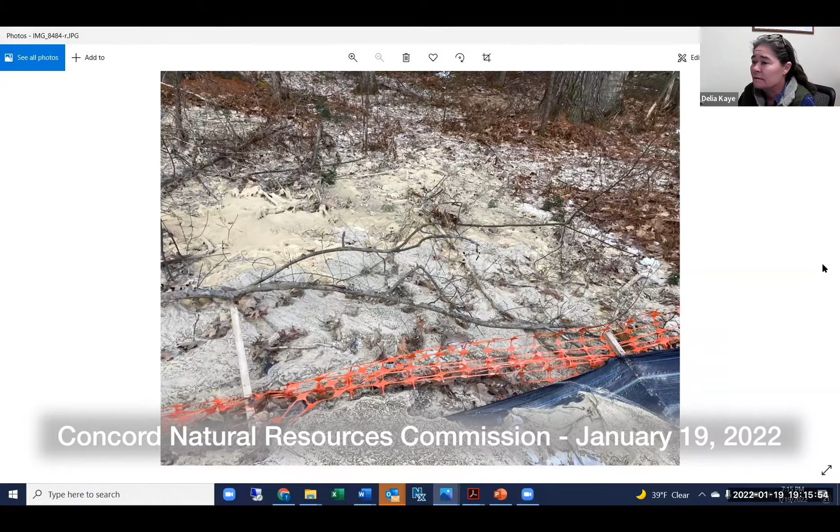So this is a photograph immediately down gradient of the overflow. This is behind, sort of in this direction is the irrigation pond. This is obviously the silt fence with overflowing silt. Heading down, let's see if I can go through some of these photos. That is a breach that we think was an underground gully. There's a little channel that's not jurisdictional, but you can see there's silt traveling all through here.

It did enter the Jennie Dugan wetland system. Let me see if I can pull up that photograph, which is, I'm sorry.

Are you seeing the wetlands? Okay, so this is where it stopped. It's not a lot of sediment, it's a thin layer of fine silts that came off the slope.

So I went out there with the assistant town engineer, Justin Richardson, and we met with the general manager, Greg Sincata, and Peter Rapocchio, who's the grounds manager, and directed them to install remediation measures. Stamsky should get out there and tell them what measures they need to take, but we suggested that at the top of the slope, they install a temporary settling basin.

Let me get back to the plan here. So where on the plan, Delia, was the breach specifically?

So the breach was, what happened was, this slope now is all planted, as is the majority of this area. They hydroseeded this actually with Flexterra, but it was planted too late in the season for them to get any hydroseed down. So there was gullying that occurred here in 2 or 3 different locations that basically traveled into this sediment forebay.

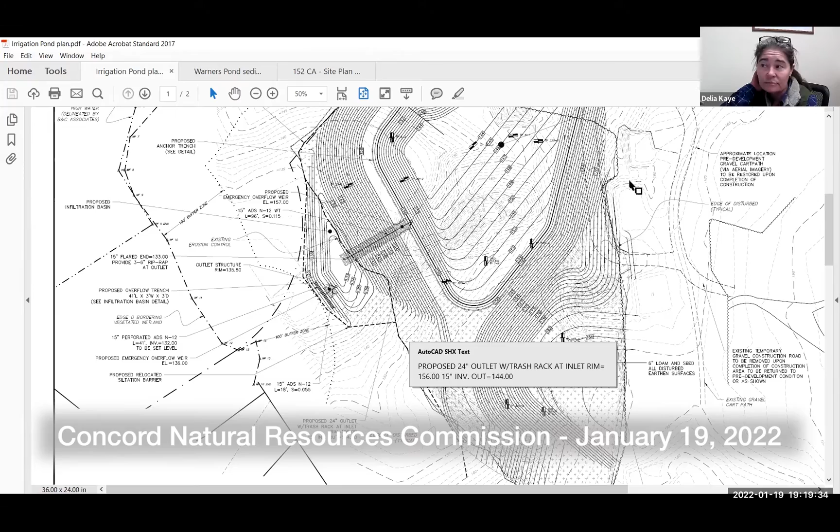So we suggested that they put in, since this is sloping down here, some sort of basin up here so that this unstabilized material has somewhere to stop, and then a series of check dams as you go down the slope into those rilled areas. Then as soon as they're in spring conditions, they'll need to replant and stabilize those areas.

So that was a disappointment. They are on top of it, they say they will get it taken care of, and that is what we hope to see in very short order.

Is any remediation needed in Jennie Dugan Brook in the wetlands? Yeah, they'll have to take all of that material out. As I said, it's a light layer of silt, but that will have to be removed by hand, along with all the sediment-laden leaf material, going back up.

So it's about 100 feet from where the breach overtopped the erosion control barrier and traveled down into the wetlands, so there was obviously some velocity associated with that.

On a positive note, last night CPC recommended their projects for the warrant, including $1 million for the Assabet Bluff housing project.

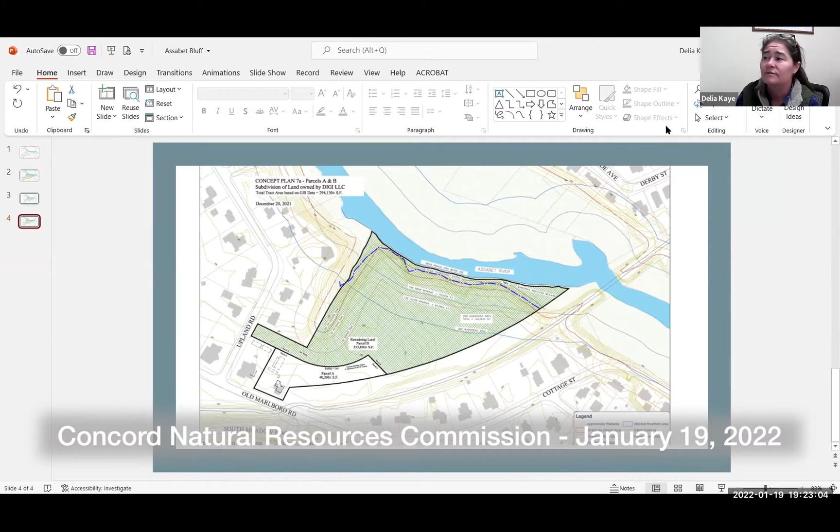With that configuration, the funding has sort of flipped from initially, when we were first talking about it, housing was going to contribute about two-thirds of the funding and open space interests were one-third, and now we're flipping that to two-thirds open space and one-third housing.

So that breaks down to, well, I don't know if you want the actual breakdowns. It's a number of different housing sources. From the Community Preservation Act, the funding allocation would be 700,000 from open space and 300,000 from housing.

And then affordable housing trust funds, this is just towards the purchase price, would contribute 600,000. Concord Housing Foundation, 50,000. And then for the open space, the land trust is committed to...

1.05 million. What we're trying to do is have that fundraising reduced. It's pretty substantial for approximately 6 acres of open space and a very short time frame with a July deadline.

We are submitting a Land and Water Conservation Fund application. I'm working on that right now. It's due on Monday. We'll also put in an MVP grant.

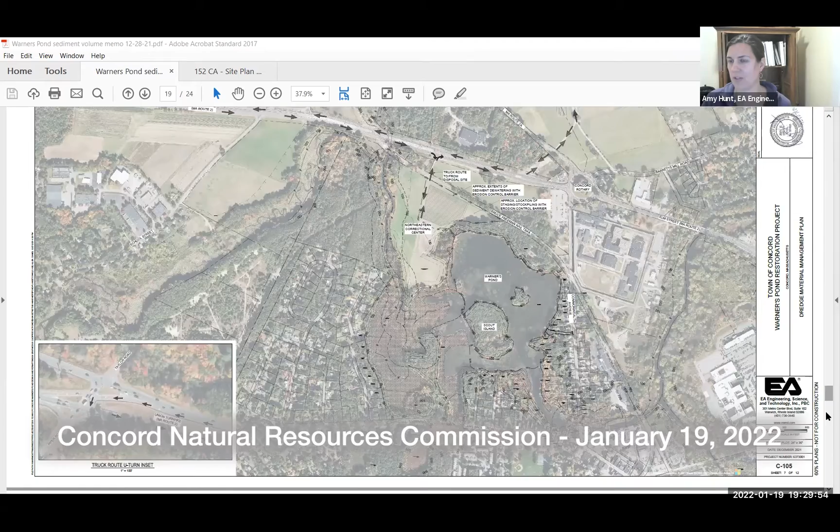Yes, so at the last meeting, there was a question on how big would the pile be, and how much material, what would the volume of material be in this pile? So we had done some calculations, and we took those and put together a memo that we sent to Delia that gets into the weeds and details of how we came up with the size of the pile.

To summarize our several-page memo, hopefully I can do that: we are excavating approximately 35,750 cubic yards of sediment from the pond, and then approximately 4,470 cubic yards of that dredge material will be pumped, still within the impoundment, from one area to another to make the wetland shelf.

So the remaining approximately 31,300 cubic yards of dredge sediment will be pumped hydraulically into the settling area that we have designed to hold that material.

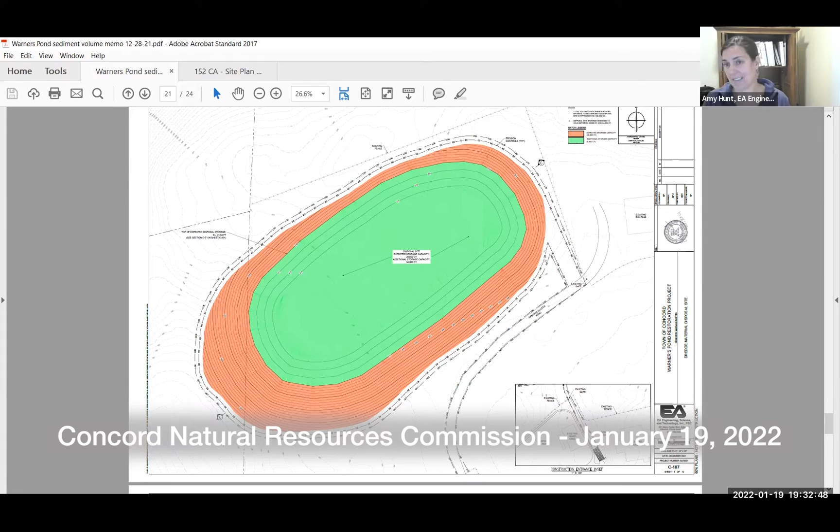If we're talking about sand, the volume would be slightly bigger than what it took up in the pond. In this case, we also have organic material. Because the material swells a little underwater - organic material tends to absorb more water and take up more space when wet than when dry. So there's a shrinkage factor also associated with the organic material.

Taking the bulking factor into consideration, as well as the shrinkage factor with the organic material - the shrinkage factor was a little bigger than the bulking factor - so the 31,300 becomes more of a volume closer to 28,000 cubic yards. That's what we've outlined in our memo and tried to show on the plans here.

We did include a factor of safety for this because, although we have the physical characteristics of the sediment in the pond, there are bound to be some areas, some pockets, that didn't get sampled. So we wanted to take that into consideration with a factor of safety, adding an allowance for additional storage of about 5,500 cubic yards of material, give or take.

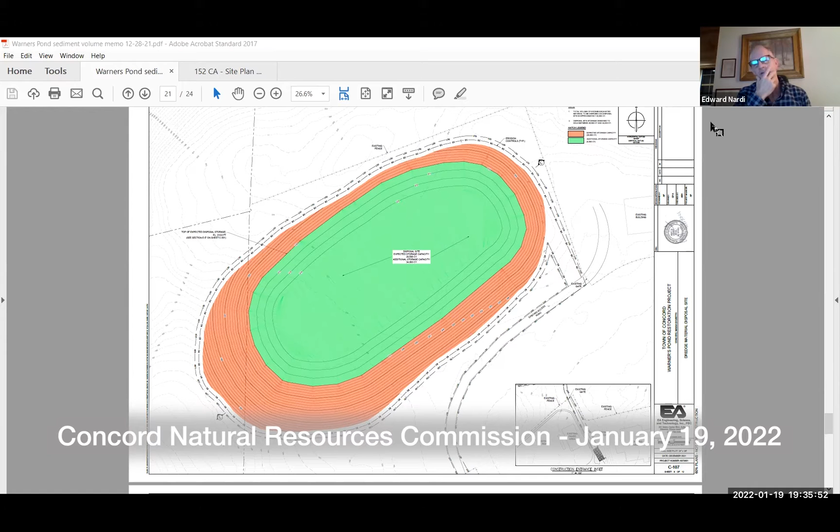Well, just as a follow-up, I think it was helpful, because last time we discussed this, I was under the impression it might be even a little smaller in terms of final volume on site after the water settled out of the sediment. But I assume, like good engineering, that's relatively conservative in terms of the engineering factors, so hopefully it will hit that 28,000, give or take. I appreciate you being conservative.

Other than that, the higher math is beyond me, in terms of some of the engineering. Any other comments from the commissioners in regard to this?

Any comment from the public in regard to this petition?

Carlin Reed, 83 West End. I'm the person who's going to be able to see this dump pile from my house. I have to say, I'm impressed with how much detail both the department and the commission has gone into looking at this aspect of a huge project, and thank you very much for paying attention to this. I do appreciate that, that's it, just my comment.

I just wanted to ask, Alex indicated he also received comments from other organizations and that he'll be responding to those. We'll get to see those responses when they come in, because I'm curious about the wetland shelf that's being developed. I'd been curious about that last time, and I see several of the questions asked about that as well.

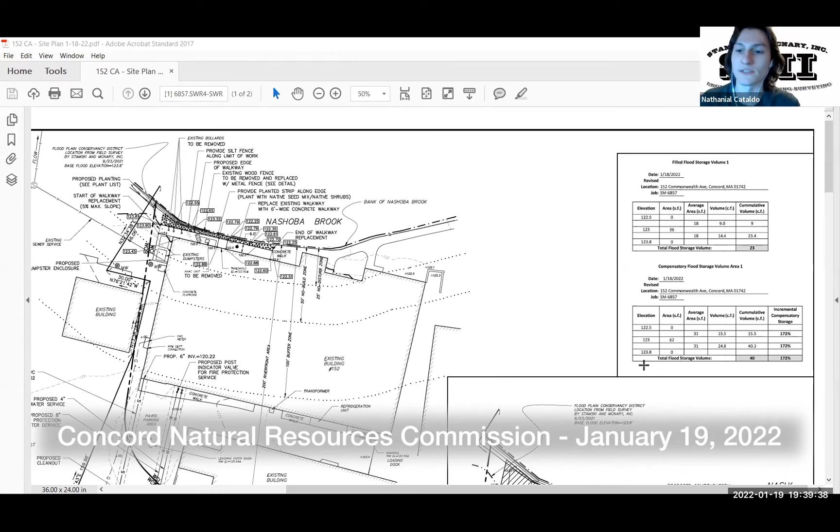Right below that is a blown up detail that shows where the areas being filled are and where the compensatory storage areas are. So basically, like we talked about last meeting, the fill is the result of the walkway being ever so slightly raised in the middle and towards the edge, to work with the grade and better come up to the door. The compensatory area is the result of the part of the walkway being taken away, so that volume is going to be taken out. It works out greater than a ratio of 1 to 1.5, as it's supposed to.

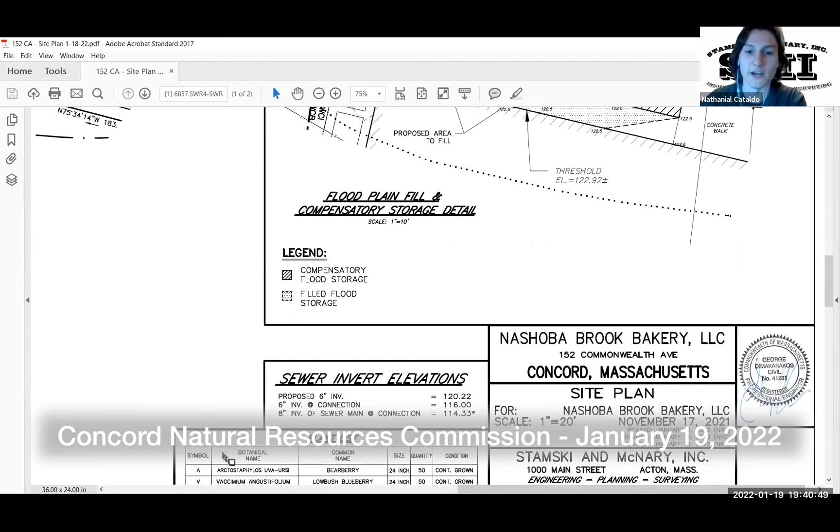In addition, in the area where the walkway is going to be removed, we got a little guidance from conservation staff on the extent of plants they wanted to see. So we provided a bunch of low cover shrubs that will fully cover the new planting area, which is going to be where the walkway is taken out. That'll better restore the area.

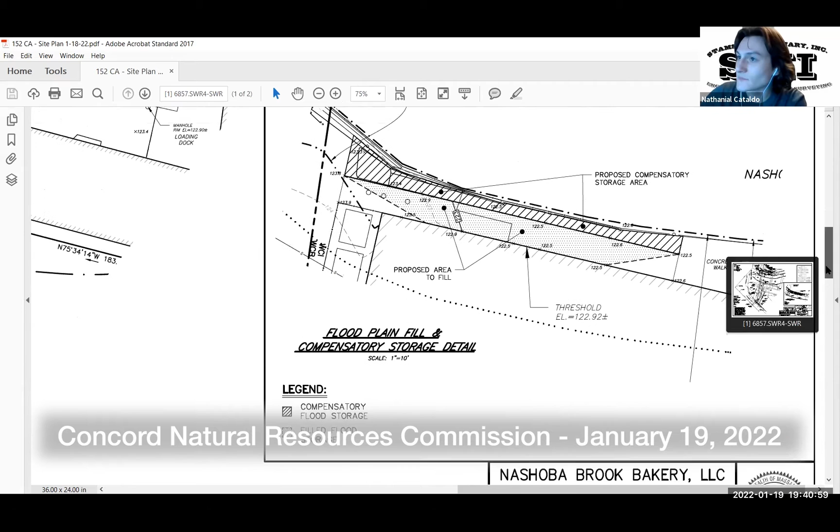That is pretty much it in terms of comments. Just to get ahead of it, the town engineer also had a comment about how the bollards were coming out, and I talked to him about it today. Really, he said it was only as an assurance that cars wouldn't drive down. However, there really aren't any there right now. I had shared some pictures with Delia this afternoon, they're just remnants, like a couple inches high, as if they were taken out, so they really don't serve any purpose.

Given that the walkway is going to be a lot shorter and a lot less wide than it is now, only 6 feet, it would be impossible for a car to drive down. So we don't really see the need to put a new one in there, considering the rehabilitated walkway will be better suited for walking and not really possible to drive down.

So that is pretty much it. I can take any questions if there are any.

Thank you, Nathaniel. Do any of the commissioners have any commentary in regard to the revised plans?

Is there any likelihood that, since it jogs there, it doesn't seem to be very suitable for bicycles either? Is that what you'd say, in terms of traffic? I don't know. I'm asking a question the engineer might ask, as in, is it likely for one to drive down there? I don't really see any need to.

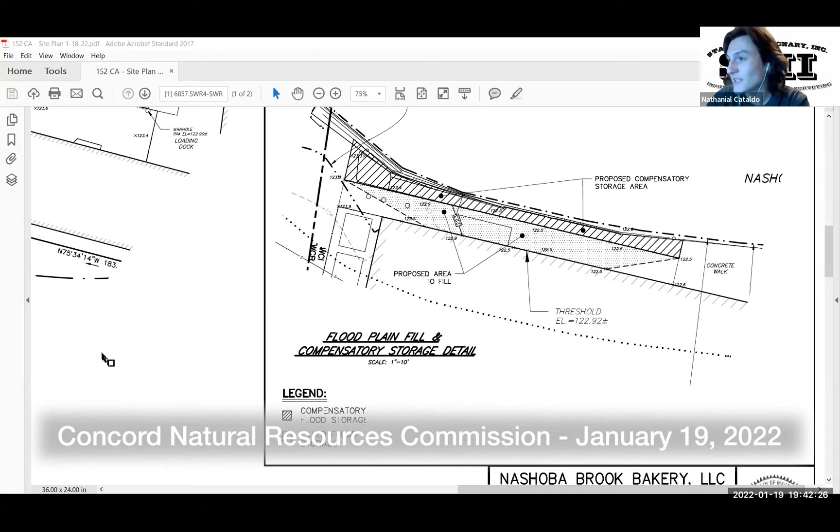There is a door, I guess there's a back door back there. I was only thinking if you go down to the bridge, if you're trying to cut over to the parking lot on the other side. I don't really think so. It's not adverse to it, but there's really nothing in place that would stop it. I really don't see any need to.

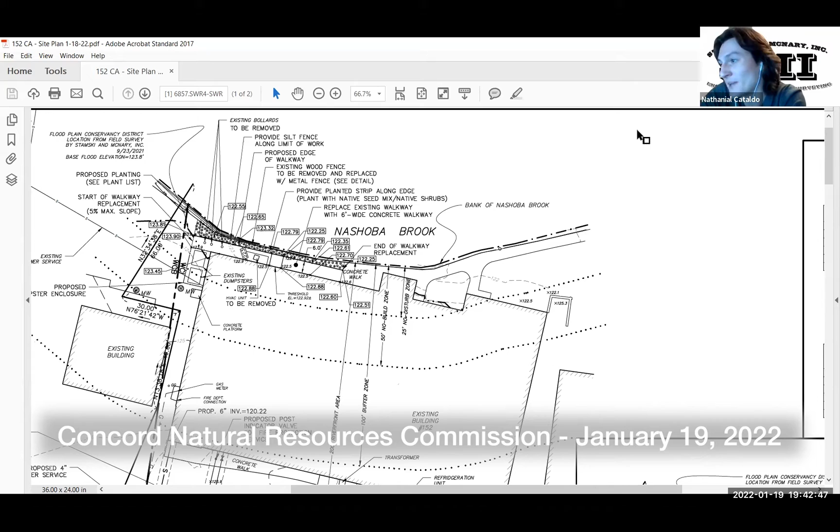It gets very narrow at one point. I agree, especially around where the bump out in the building is. Right, I don't think it's a safety issue, and I also don't really think it's encouraged. Okay.

Any other comments from the commission? I just had one comment, Nathaniel. Delia, do you have a picture you could pull up of the existing condition? I was wondering, where you're cutting out and doing the plantings along the edge there, I did see in the picture that there seems to be some boards along the rail edge. When you replace the fencing, is there going to be boards put back, or a metal edge, to retain the plantings and soil so it doesn't fall over the retaining wall? Nathaniel, can't hear you again.

Okay. Try again. Not yet. Hold on, is that working? Yeah, yes, now. Yes. Okay, thank you. I need new headphones. Sorry about that, looks like it.

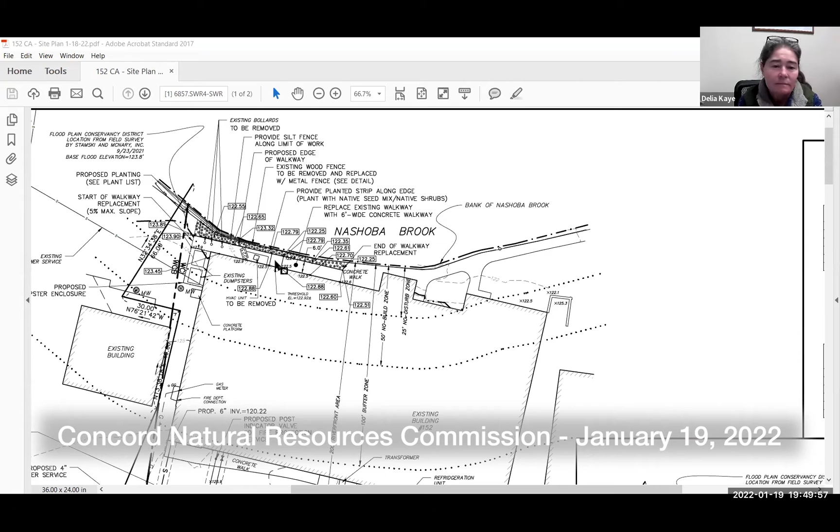At any rate, if you could take a look at that, Nathaniel, just trying to safeguard debris going into the brook. And also, I'm just noticing this 223, shouldn't that be 123? Oh yes, yep. Okay.

Any comment from the public regarding this application? All right, okay, hearing none, I think we'll hold over to February 2nd. Delia, I would assume we could get an order of conditions together by then?

Yeah, okay. And just the big comment there was kind of have pitch the walkway such that it pitches down towards the middle and terminates at the end of where the pavement is, I guess, right? Well, I think because you're so limited, don't you have to hold your elevations now, given this cut and fill and the storage volumes, right? I don't think you want to, if you change that, you're gonna have to change...

So what is it that, just so I have it clear, what's the main thrust of the comment? Yeah, the main thrust of the comment is to make sure the soil is contained, that it's not gonna, in a heavy storm, wind up in the brook. If you get a major rainstorm and it's slowly sheeting through that light ground cover plantings, you might get some spillage over into the brook, that's all. It's a relatively straightforward comment, if you will.

Ed, Suzanne Delia, you have your hand raised. Thanks, I've been working with the bakery on this. Can I have your name and address for the record, please? Suzanne Spinney, 270 Fisk Street, Carlisle.

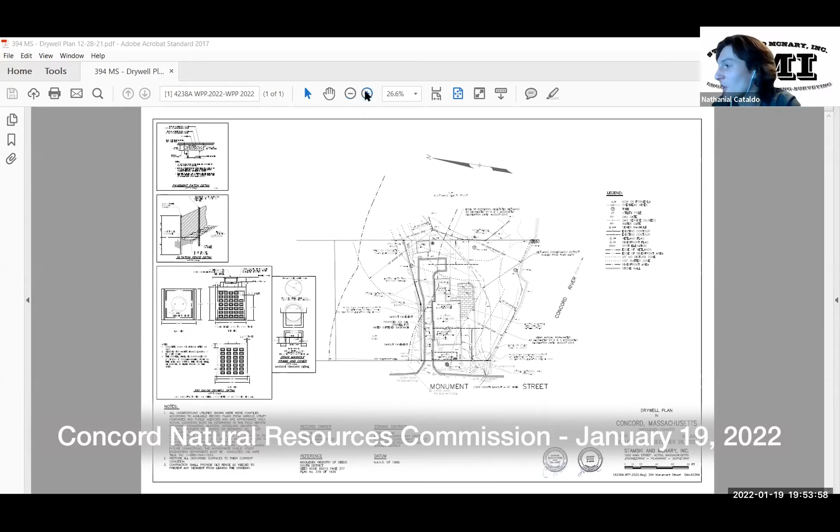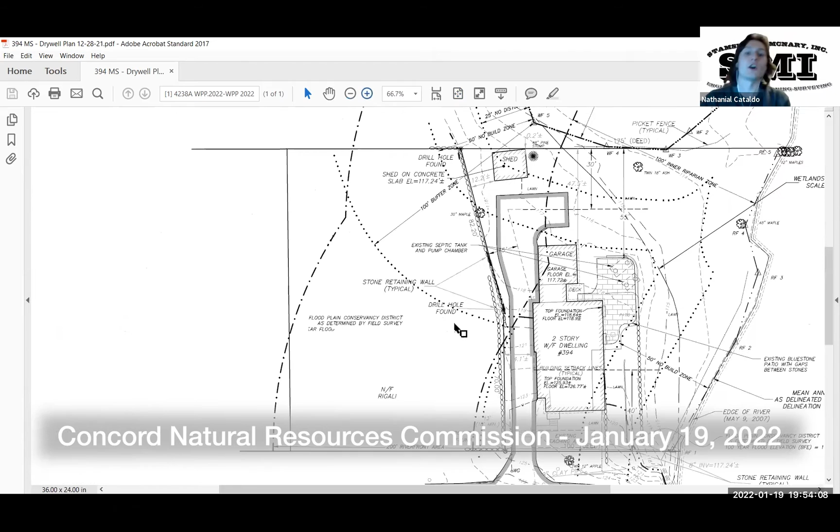So just again, my name is Nathanial from Stamski and McNary. I will also be talking about the RDA for 394 Monument Street. So this is the plan - it's a single family house, bordered by the Concord River to the south, which has a bordering vegetated wetland that runs along the edge. So it projects a 200-foot riverfront area on basically the entire property and a 100-foot buffer zone from the wetland. There's also bordering land subject to flooding along the back, kind of at the rear of the house.

So the work consists of installing a dry well in the pavement. Just a little background real quick: this house has hard water, which is basically when there's a high mineral content in the water. It has the potential to damage your appliances, stain dishes and whatnot that you wash. But really, the big thing is it has the potential to corrode and wear at your pipes and appliances.

So the homeowner is installing - he's working with the contractor, and this is what they recommended - a water softener. It's basically a system inside the house that removes the mineral content from the water, and the system produces a backwash about once or twice a week. The backwash drains into a proposed dry well. That's really the subject of the work here - they're going to install just a 300-gallon small dry well underneath the existing driveway that will receive the backwash from the water softener.

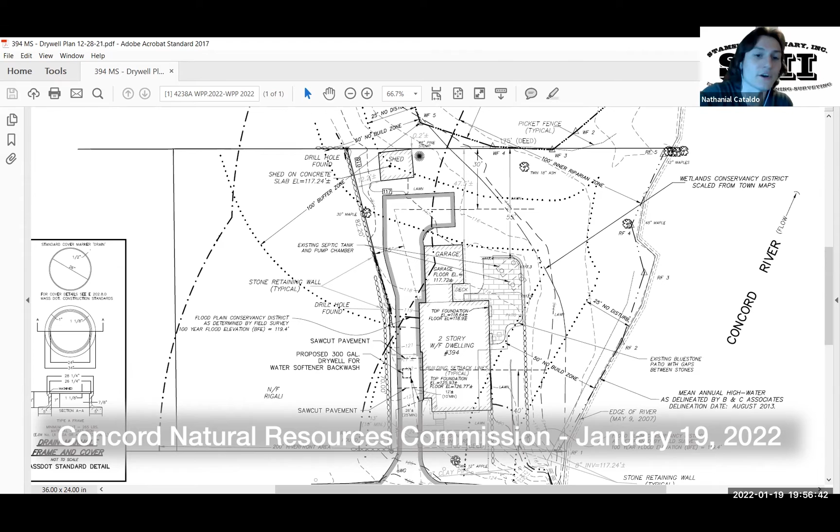Looks straightforward from here. Any comments from the commissioners? I'm just curious whether the backwash has any chemicals, or is it purely mineral content? Yeah, I researched it quite a bit - basically there's like a salt, sodium, and the chemical reaction is what takes the minerals out of the water. So whatever runs into the dry well will be the minerals that were already in the water anyway, which are dispersing to the septic system, plus a little bit of the salts it uses. But the whole point of installing a dry well is that it's going to disperse it into the ground over time, so there's no worry of an excess of minerals going into the ground. Hope that answered your question?

Yep, that's it. Okay, so looks good to me. All right, is there any public comment regarding this proposal? Okay, seeing none, I think we have a recommendation.